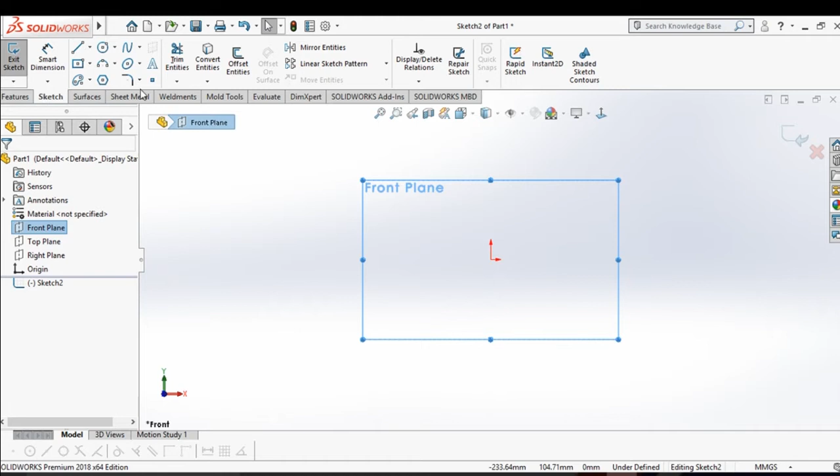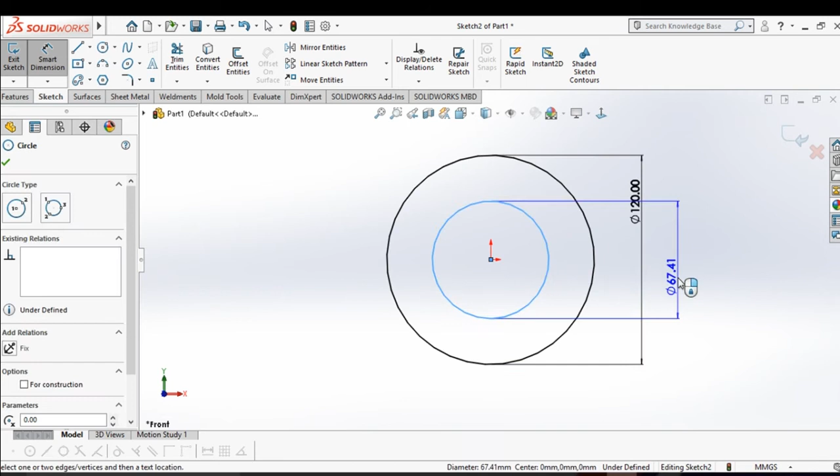Okay friends, firstly select the front plane, then sketch on this plane, then select circle. I will draw two circles. Give the dimension of these circles. The dimension of this circle is 120mm, sorry, then this one is 25mm.

Now go to features and extrude boss feature. Select the mid plane, give the dimension between as 25mm, then okay.

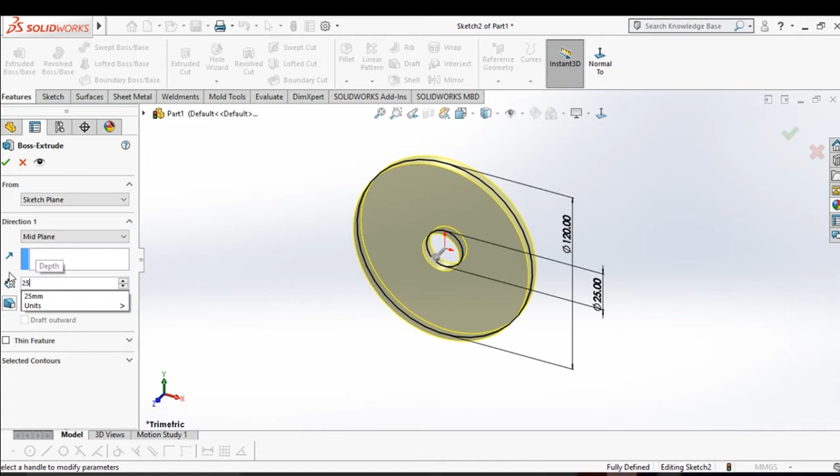Friends, now select this face and sketch on this face. Draw a circle. Give the dimension of this circle, 80mm.

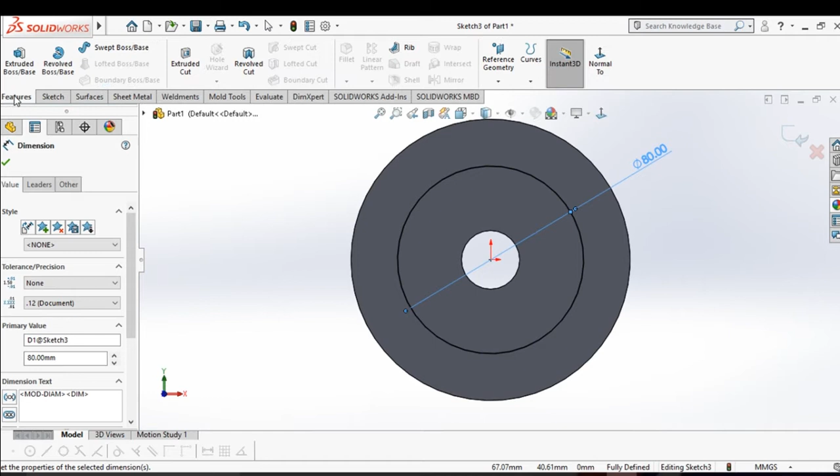Select, go to features and extrude cut, 8mm, then okay.

Select mirror, select the front plane, and feature, then okay friends.

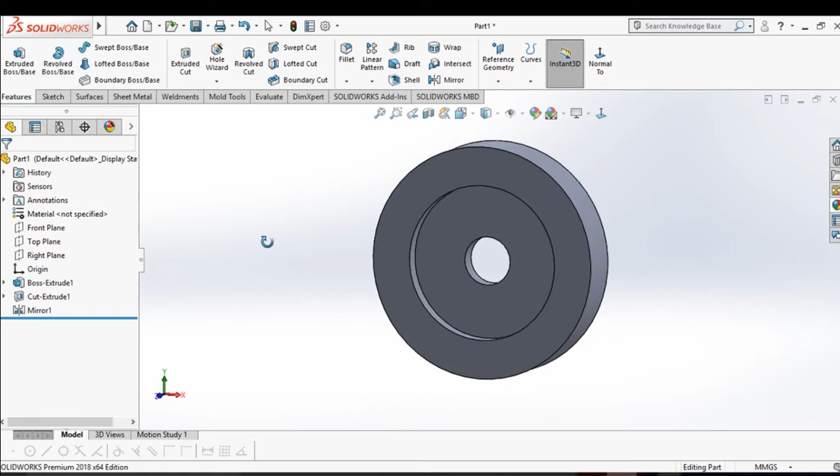Now sketch on this face. Select the circle. Give the dimension of this circle, 10mm. The distance between here to here is 25mm.

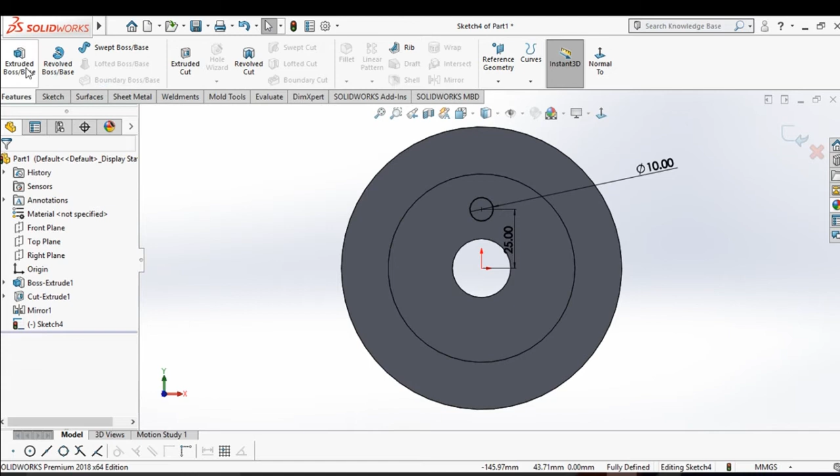Select this point and this point, make vertical. Go to features, extrude cut feature, and select through all, and okay.

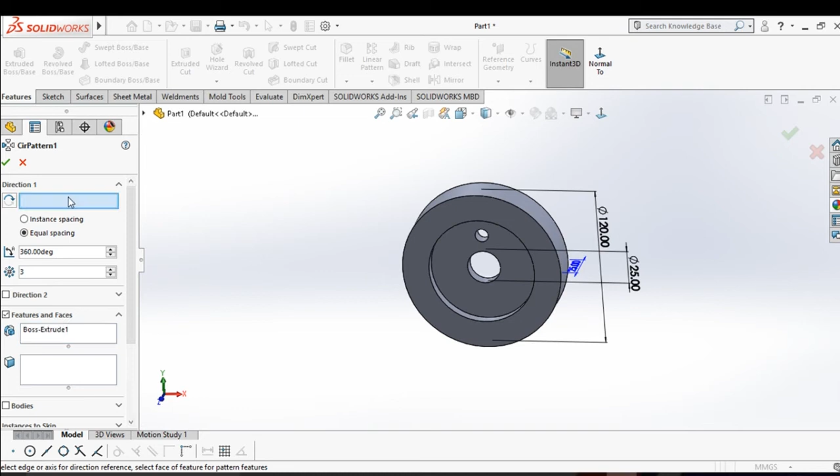Go to circular pattern, select this face and select the feature, then okay.

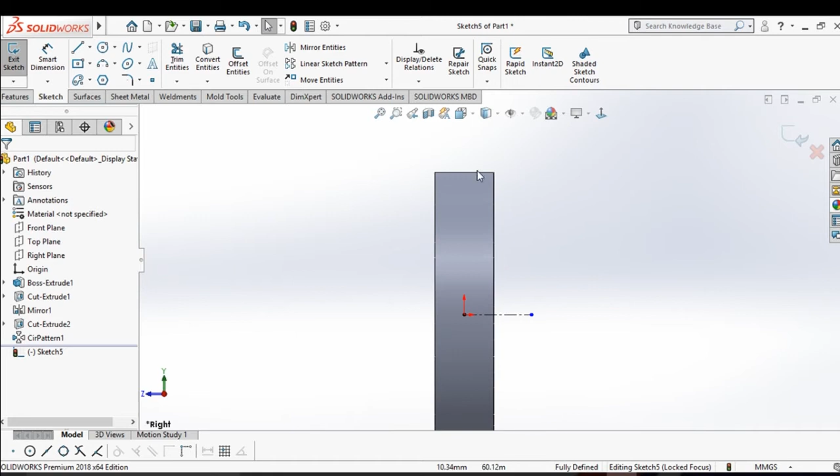Now select the right plane and draw a center line from here to here. Okay, now convert the entities of this, then okay.

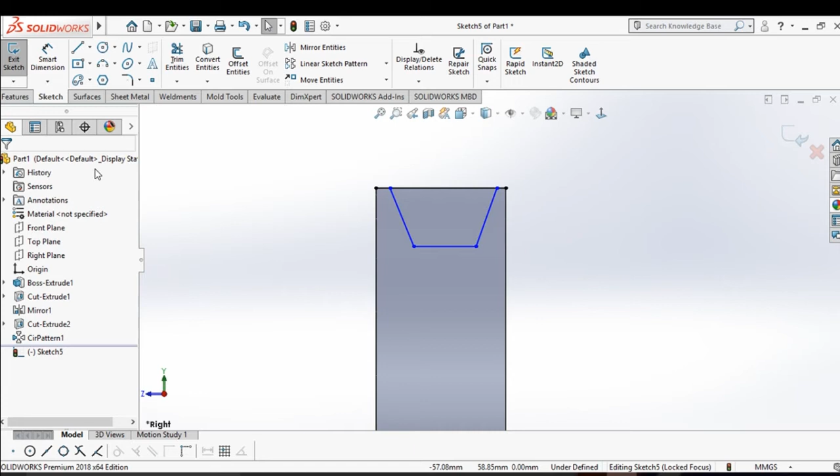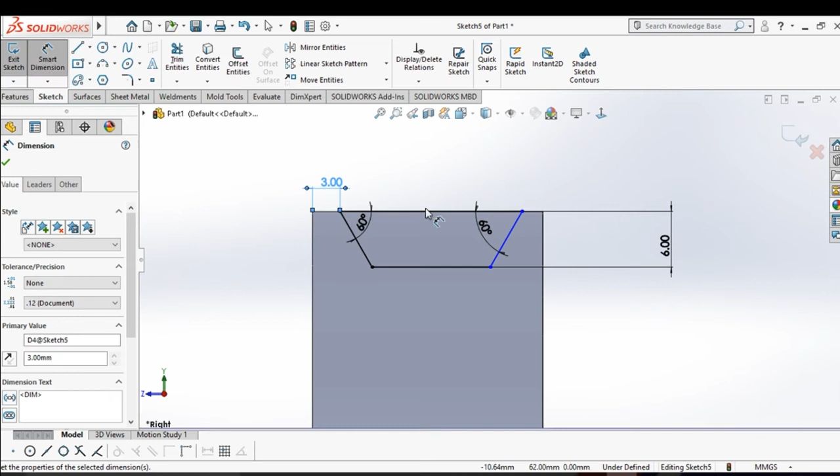Now draw, then trim these entities. Here to here is 6mm. The angle between this and this is 60 degrees. The distance between here to here is 3mm.

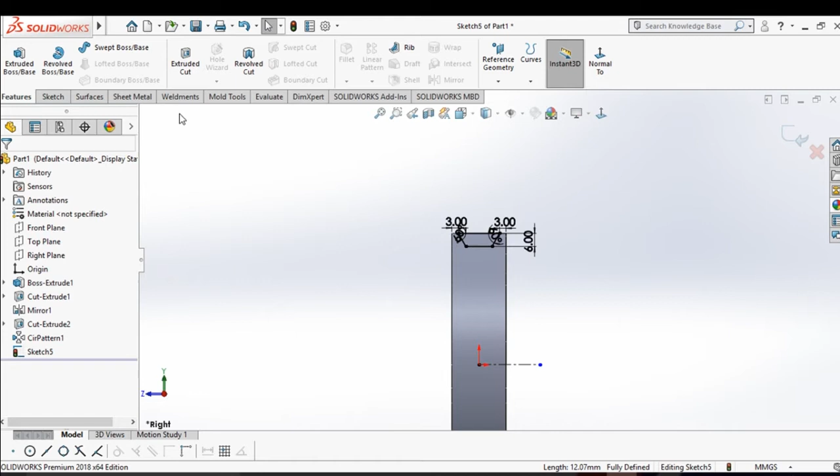Now go to the features and revolve cut feature, then okay.

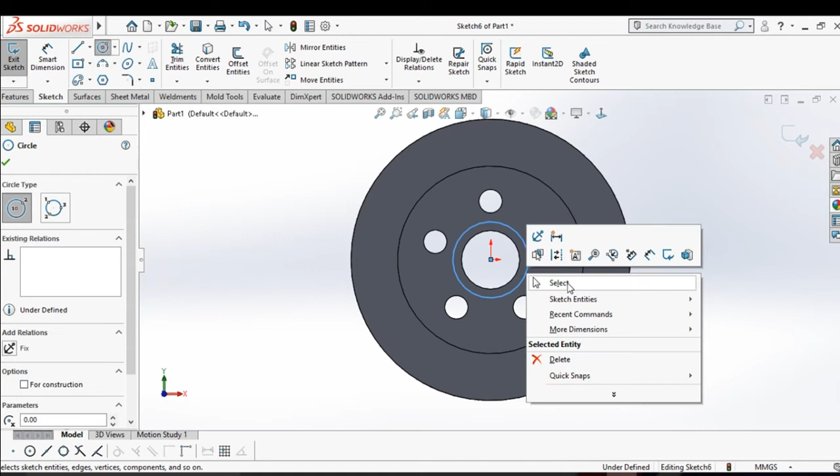Select this face, go to this face and okay. Draw a circle, 27mm. Then convert entities.

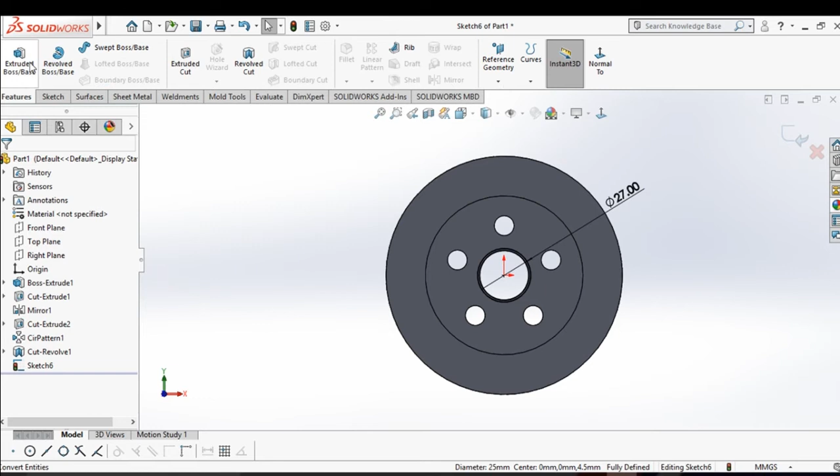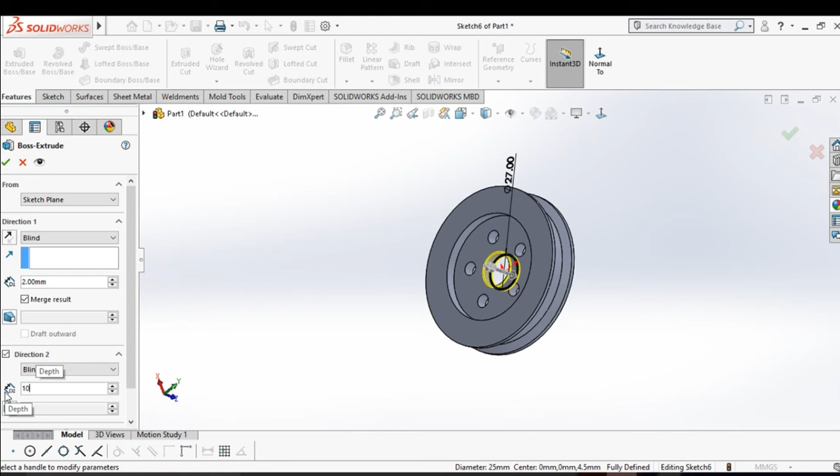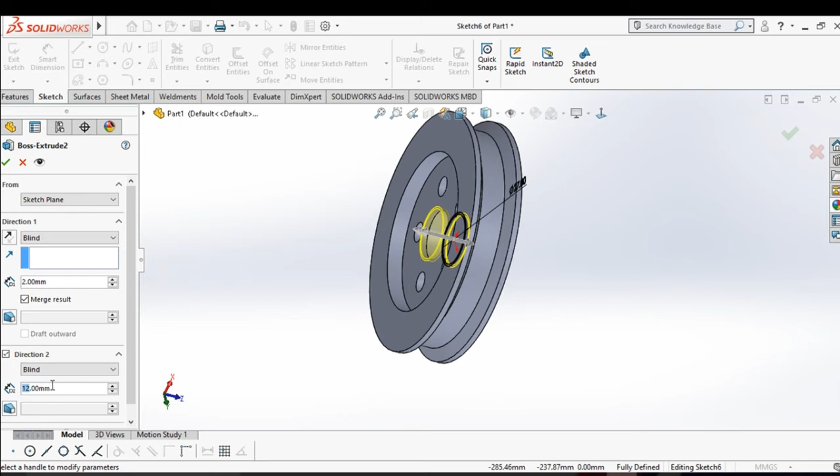Okay, go to the feature and extrude. Mark direction 2 and select the second dimension, give the dimension of 10, then okay. Sorry, give the dimension again.

It's a big pulley, and now again design a small pulley, and we don't need to design the big pulley again. I will change in this pulley. Okay, firstly save this pulley as big pulley, save.

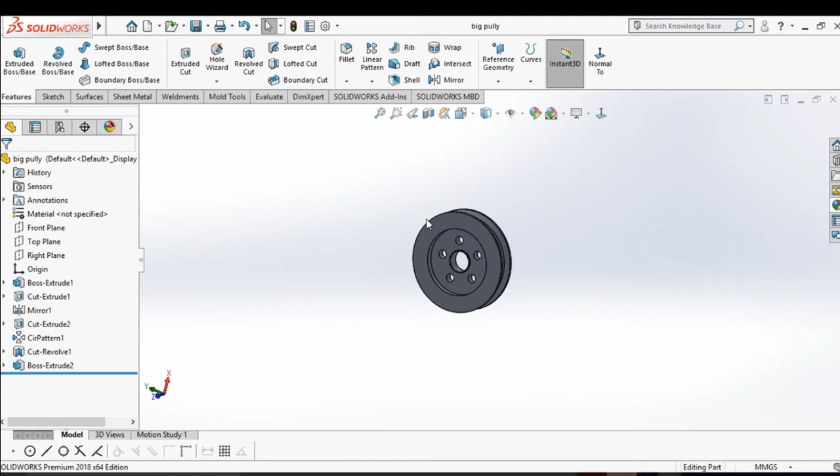Now change the dimensions to make the small pulley, so I will change in this design also. Okay, drag this and change this.

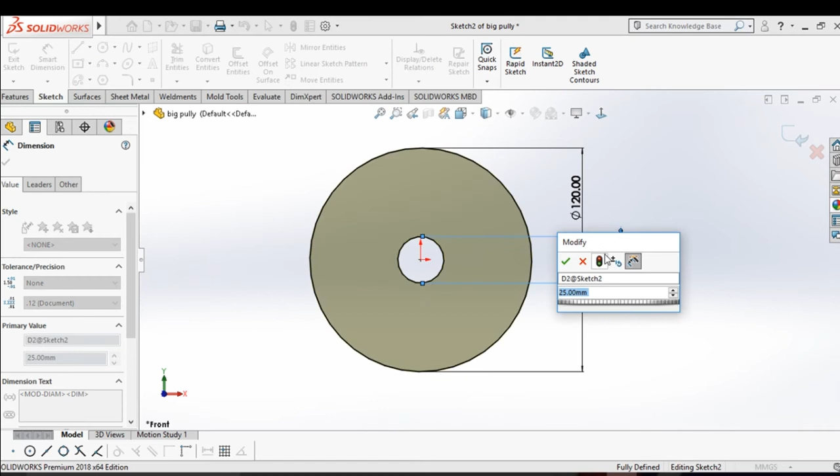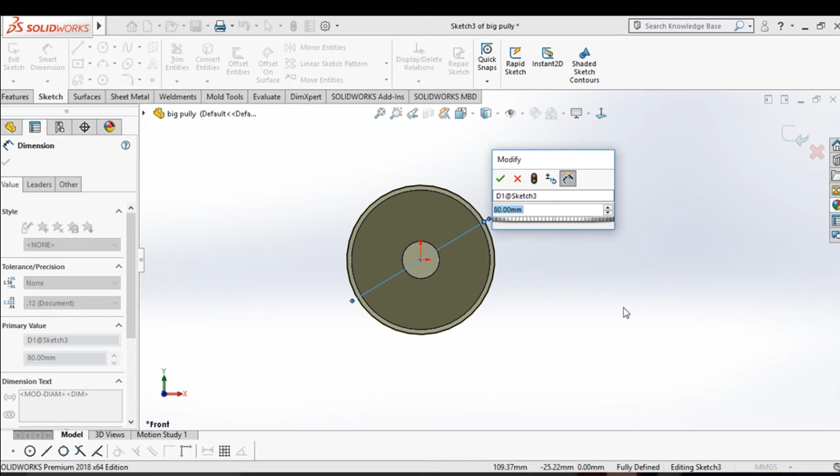Keep this 20. Okay, and this 75. Okay, then cut features, change this cut feature, keep this 45, keep 55. Okay, then okay.

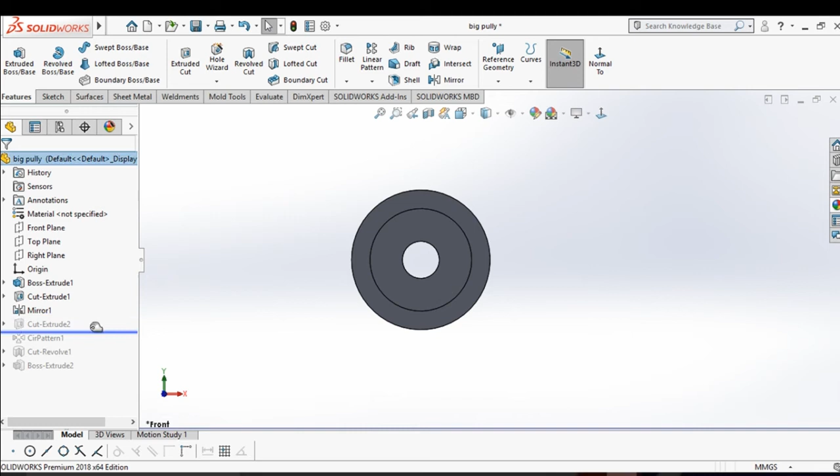Now again exit from here, mirror feature, then change into this feature sketch, 6mm, and distance from here to here is 15mm. 17mm, 1 and 7, 17mm.

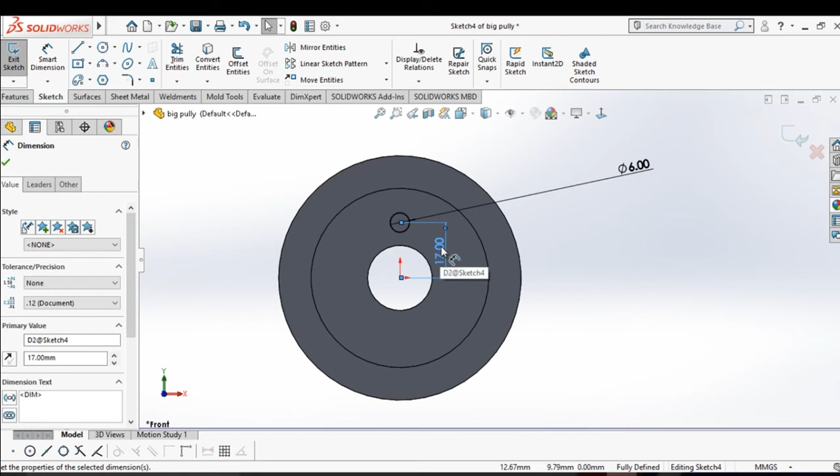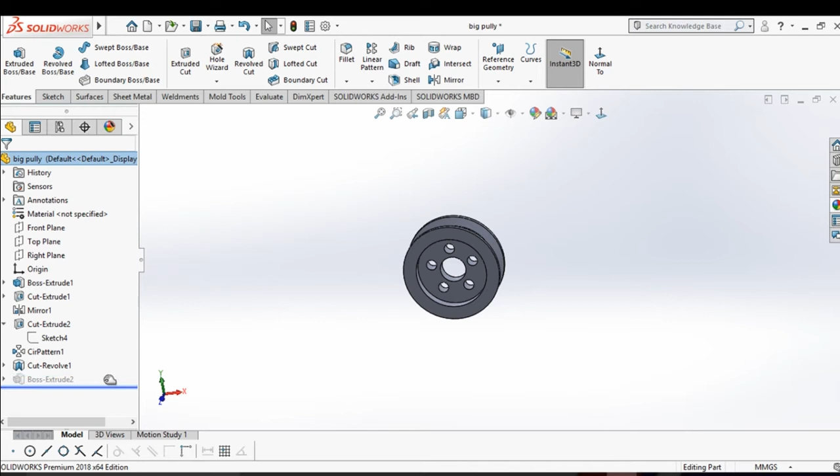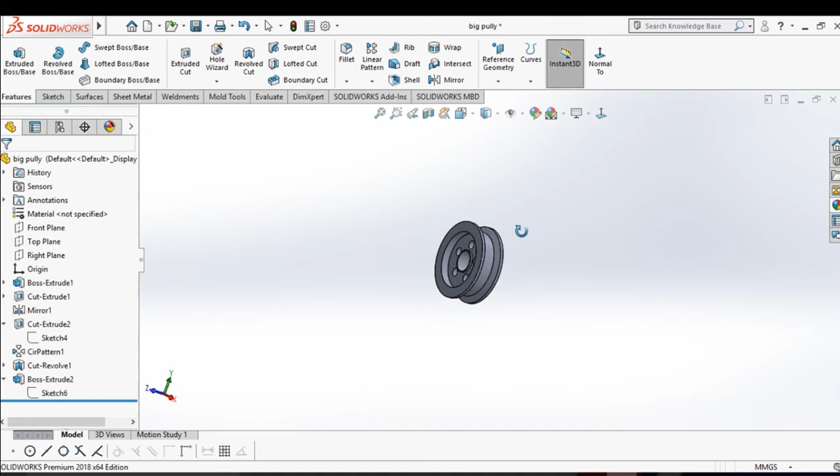Save again. Save as small pulley, small pulley, then save as. Okay.

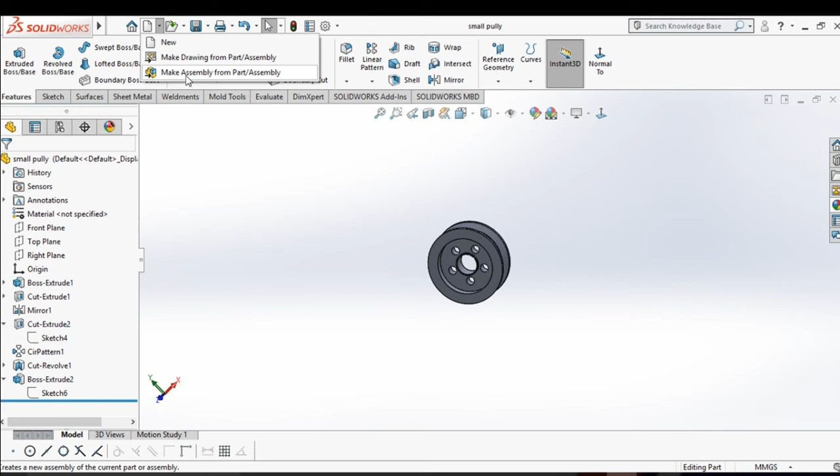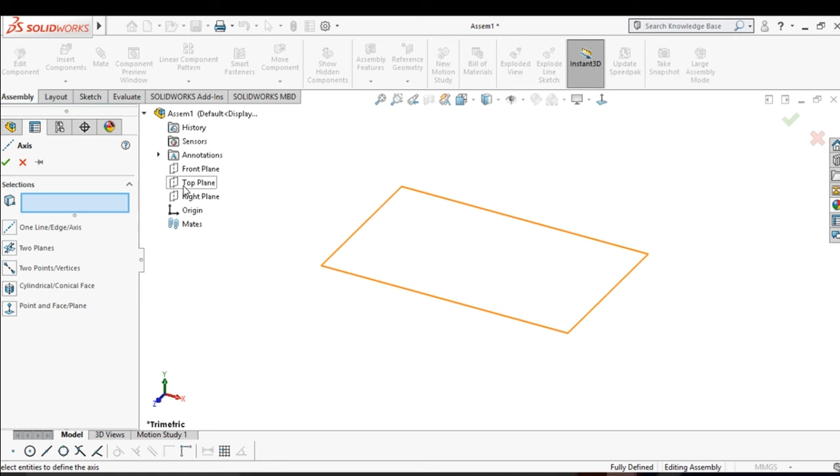Go to the make assembly part. Now we will make axis, two axes, so select top plane and right plane. Select firstly the reference geometry and axis, then I will select top plane and right plane. Generate one axis, then again select the plane, right plane, and make a plane.

The distance of this plane is 180mm.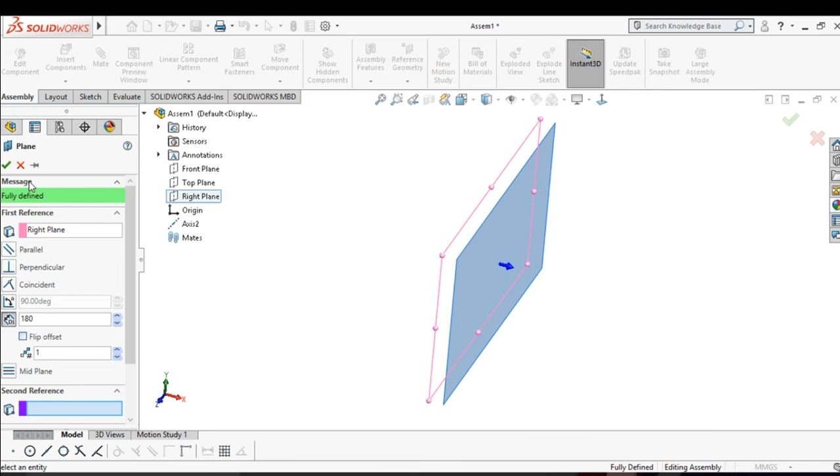Okay, now again we will make an axis. So select axis, then select the plane, top plane, then okay.

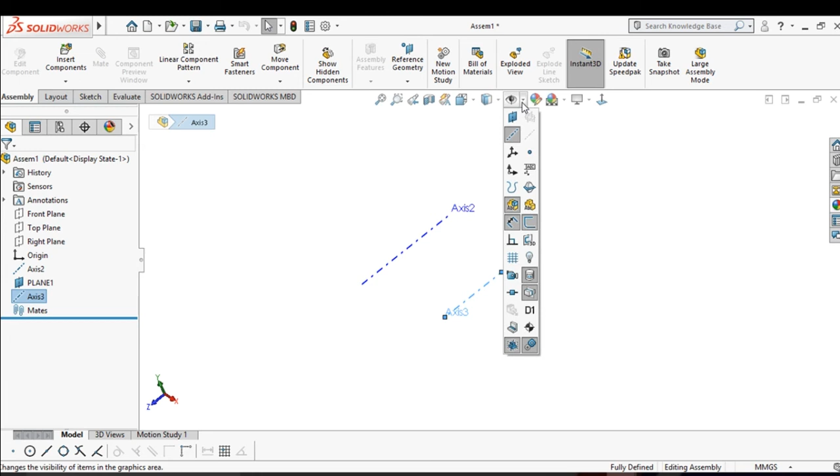Show all these axes also. Show here two axes, and if you don't see the axis, please click here and show the view axis.

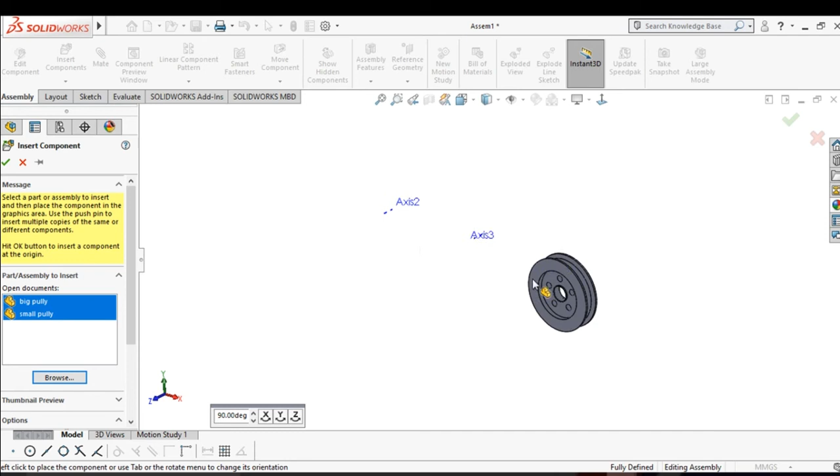Fine, okay. Now insert the component, select insert component, browse the features and insert the component, big pulley and small pulley.

Okay, now we will use mates on this. Select mates and select the face and select the axis and use this mate, then okay.

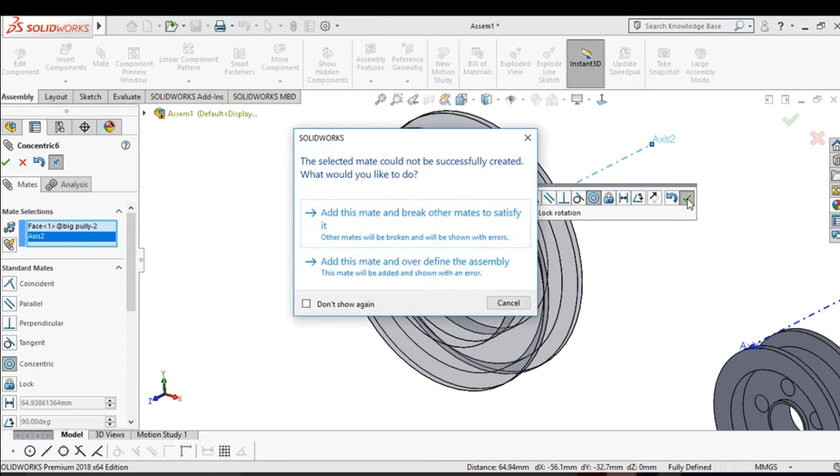It's not selecting because firstly we use the float feature, then we can use it floating, then now I will use mate.

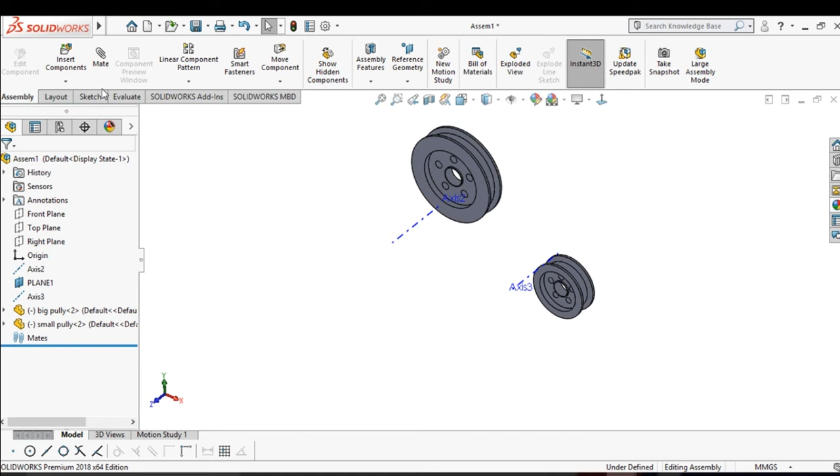Okay, select this and then this, then okay. Now again select this axis and this axis, then use okay.

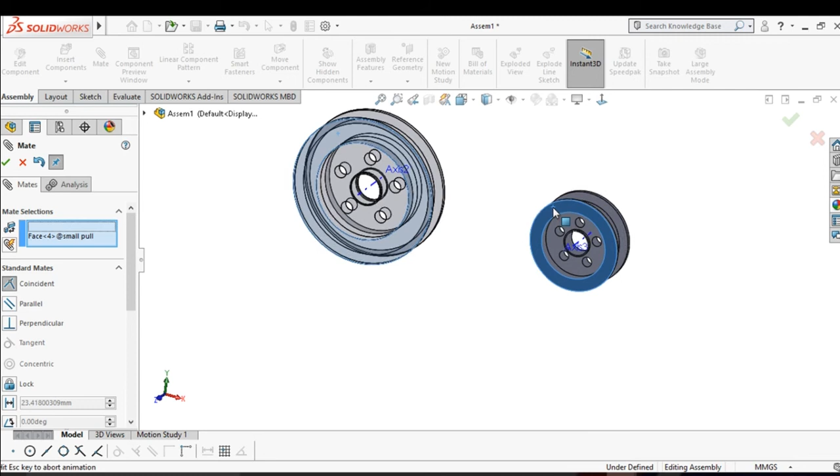Now select this face and this face, make coincident, then okay. Now hide this axis.

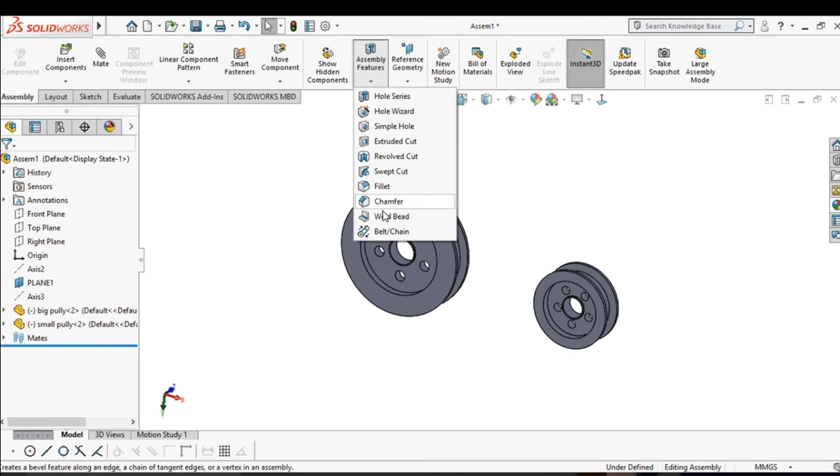Now I will select the assembly feature and select belt and chain, then select this and select create belt part, then okay. Save and continue, then save and continue. Name this part belt, then save.

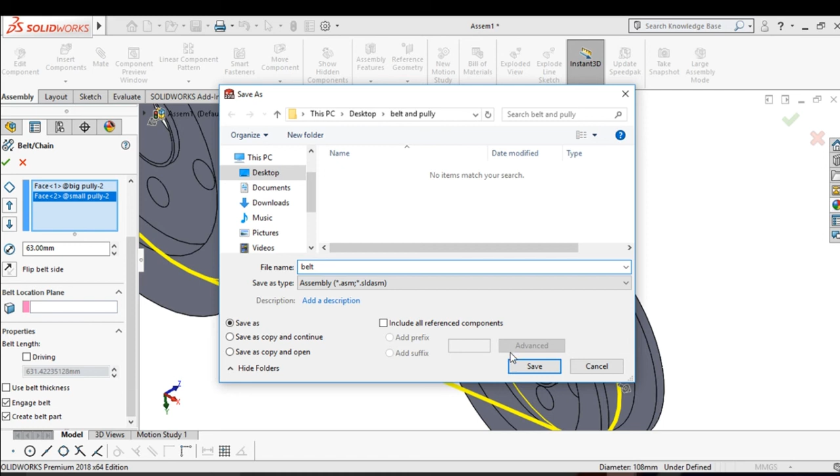Okay, now select this and open the part, use right plane and sketch on this plane.

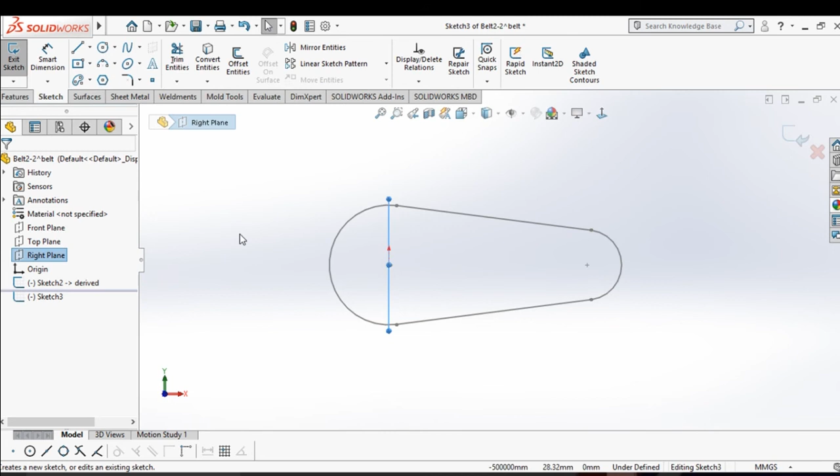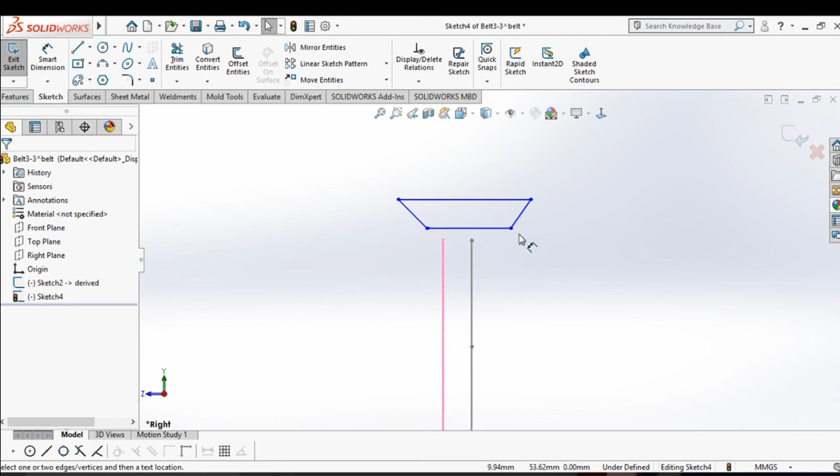Now sketch here. Now select the line and give the dimension, smart dimension 19.

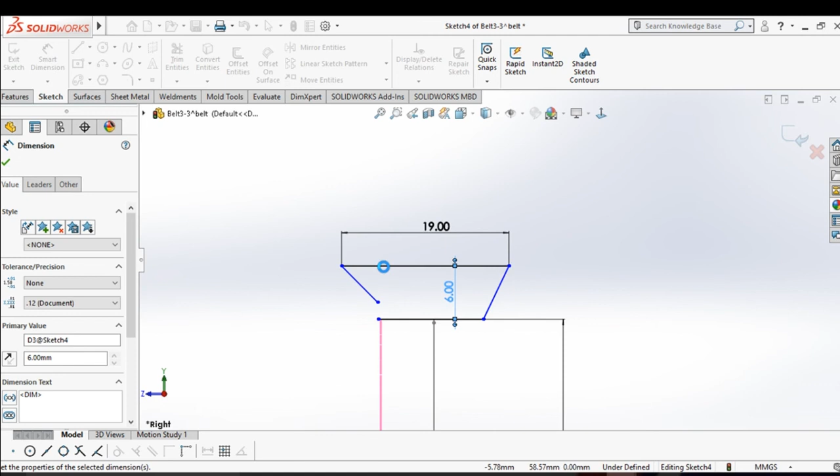Okay, the distance between here to origin is 54, distance between this line and this line is 6mm, angle between this and this line is also 60, and this line and this line also 60 degrees. Then okay.

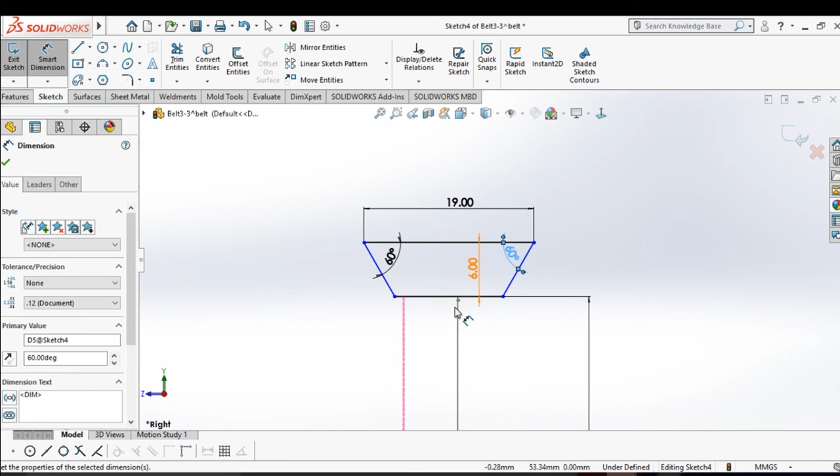Select this point, and this point is 19 divided by 2. Then okay.

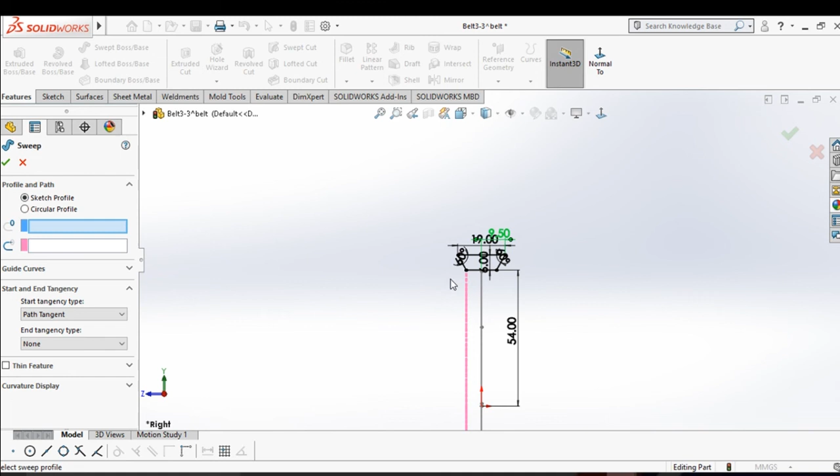Then select the features, swept boss features, select the sketch and select the profile and path. Then okay.

Now save this, name it belt.

Now I will use motion on this belt and pulley section. Then select motion study. Okay, then select the frame per second and 10 frames, then okay.

Then select the motor. I can use motor on this face. Change the rotation direction, give the RPM, 100 RPM. Okay, then okay.

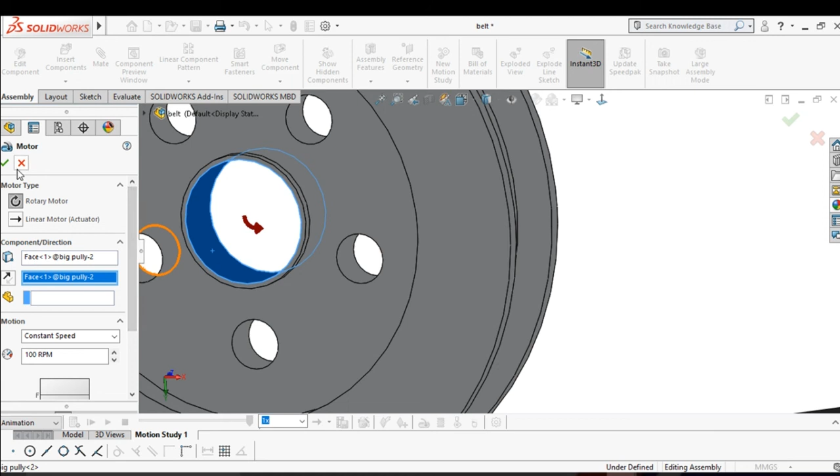Now you can watch this. Select this, you can increase the seconds and you can watch again.

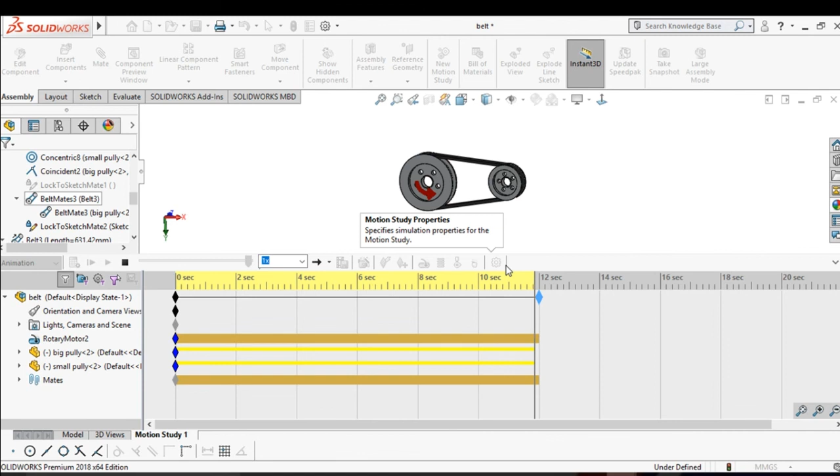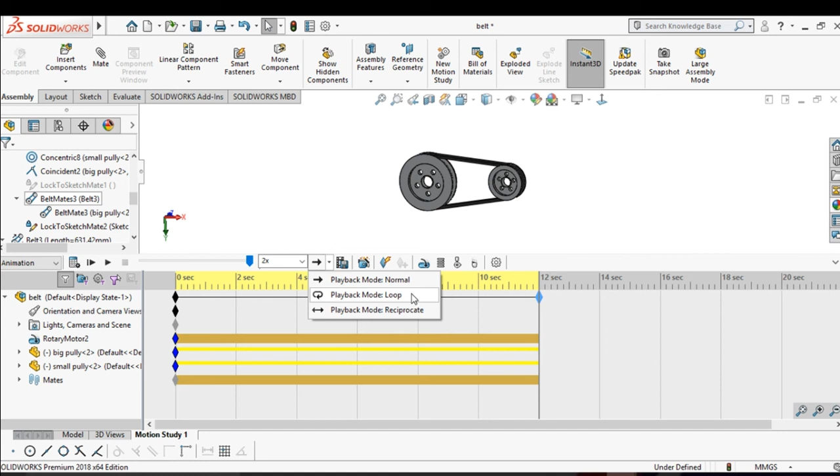You can change, you can increase the speed from here, the watching speed—it's only the video speed, not the motor speed. Okay, you can change here playback mode, normal playback mode, or loop.